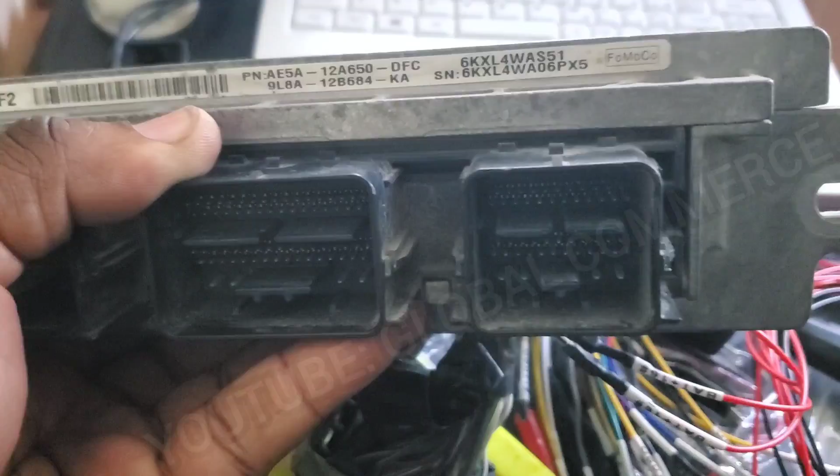This is for a 2010 Ford Fusion 2.5 liter, and we've got the connector. By the way, this first connector here is the body connector, so this is where your power, grounds, and communication are going to come in from.

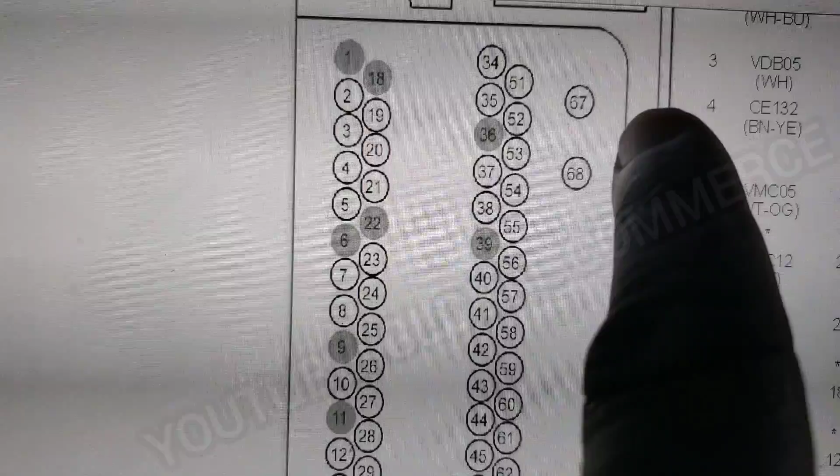Here's the pinout. So on this side, 68 and 67 is power, battery power, and 69 and 70 is ground. Then you got 38 right there, that is your ignition power.

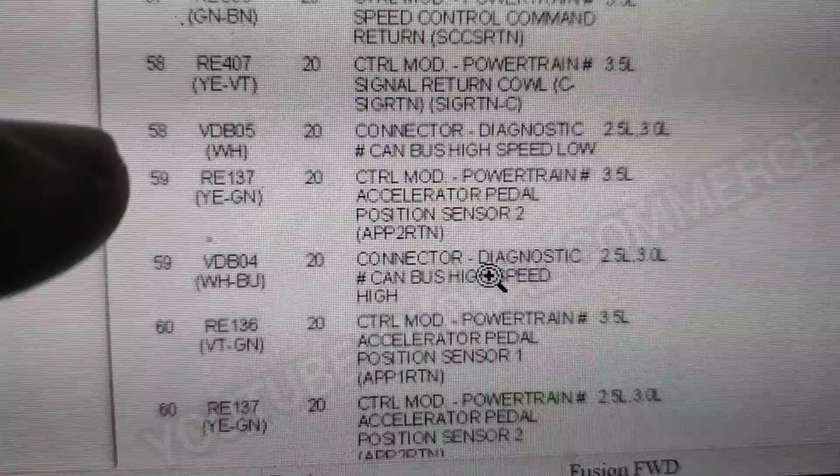It's a yellow and green wire. Here's your powers, white and blue. Actually, this is can high and can low. My bad, let me make sure, 58 and 59. Yeah, so on the 2.5, 58 is white, which is can high, and can low is white and blue. Actually, I'm sorry, can high is white and blue, and white is can low, all right?

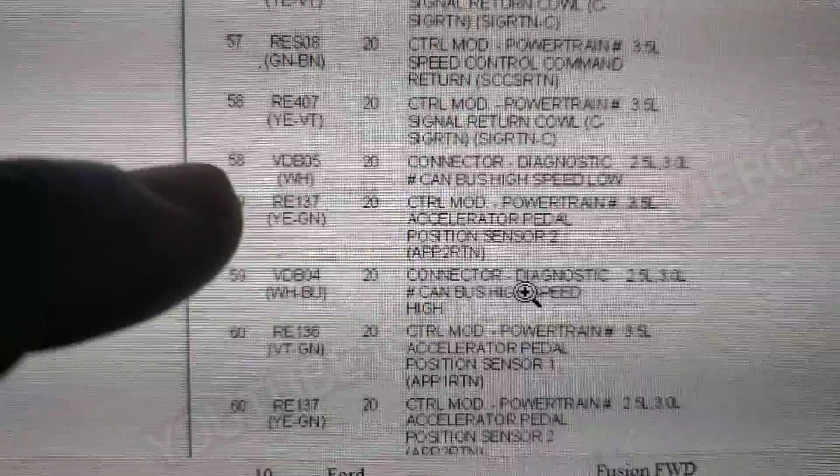And then at 63, we've got our FEPS connection. That's very important. Without your FEPS line, you will not be able to put the PCM in programming mode, and that is going to be at 63 right there.

Hey guys, so there it is pinned out. As you can see, pin 63 for our FEPS, we've got it connected there. We've got our can high right here, if you can see that, and then that will be can low in the white. Then we've got our two grounds, and then we've got our constant power. Then we've got our ignition, should be right here. This should be ignition. There it is, ignition, right? So when we actually turn on our ignition switch, we'll get power.

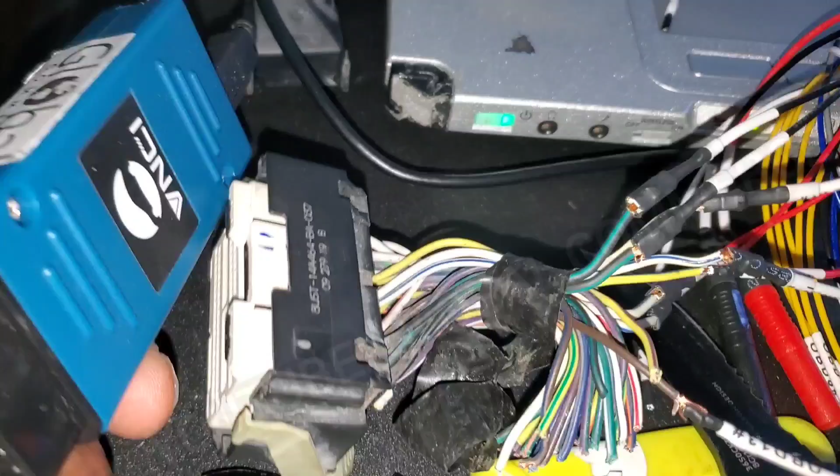Make sure guys you're updating your firmware. We are constantly, me and VNCI, we're partnered on this, so we're constantly updating the firmware. This is a new product, so as we find little bugs here and there, we're fixing it. So pretty much I think we got pretty much everything down packed, but it is a work in progress. Keep that in mind, but it is operating and doing everything as it's supposed to.

So now I went ahead and plugged in, and as you can see, we've got our ground already connected because 4 and 5 are bridged. Now I'm going to go ahead and connect it in our PCM. I always do a quick check using ForScan just to make sure my connections are good, and my connection was actually backwards on my power.

So the white and blue coming from, I believe, what was that? The ones at the bottom, the white and blue connectors for the power, those should be your ignition power, right? So I just swapped it, I put ignition, and that's it. So I can now turn off the ECM with this red ignition switch when you need to turn it off, so just keep that in mind guys.

And there you can see the activity lights. We've got a green and a flashing blue, and the VCM is active.

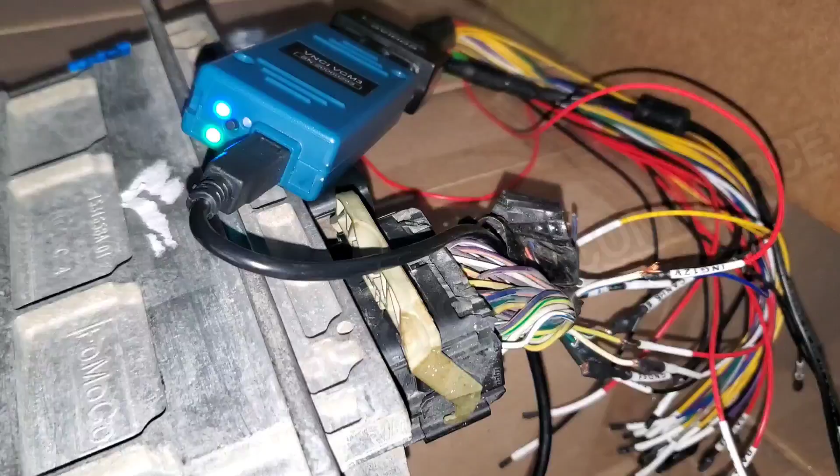So let me close out of here, and now we're going to go into our VMware image available on our website. Comes with the GC VCM3 unlimited IDS, so you can do everything you need to do, you don't have to worry about it. And as you can see, this is the current VIN that is programmed, 07693. So that is going to be changed by the time we're done with this. So I'm going to tell this, no, I don't need to save that, and I'm going to exit out of here.

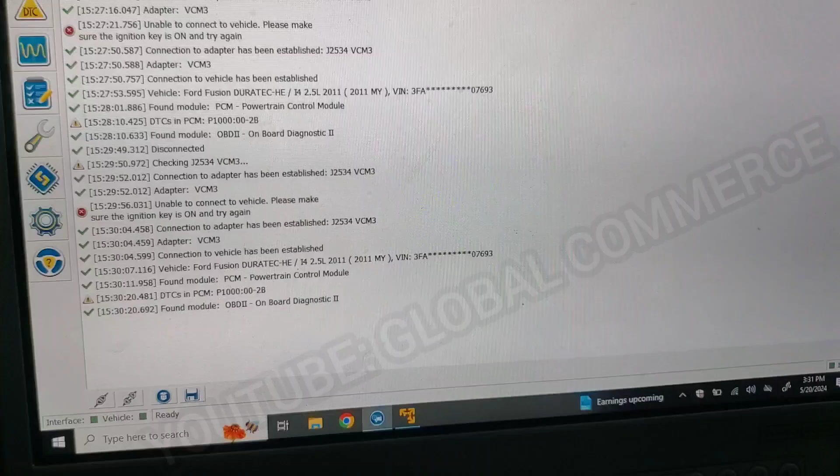And I already have VMware Player open. And guys, some of you had some issues installing the VMware Player. This is very simple, it's only 3 steps guys. You download and install VMware Player 17, and it will come up to this menu, but these will be blank. I have multiple in here, yours is going to be completely empty.

And all you do is open virtual machine, and you navigate to the file that you downloaded from our server that you extracted, and you just open that file. And that's it, that's the step everybody misses, and it's on the instructions. It's not rocket science guys. Anyway, I've already got mine added in, and one quick tip, in case you get an error, it's actually this one.

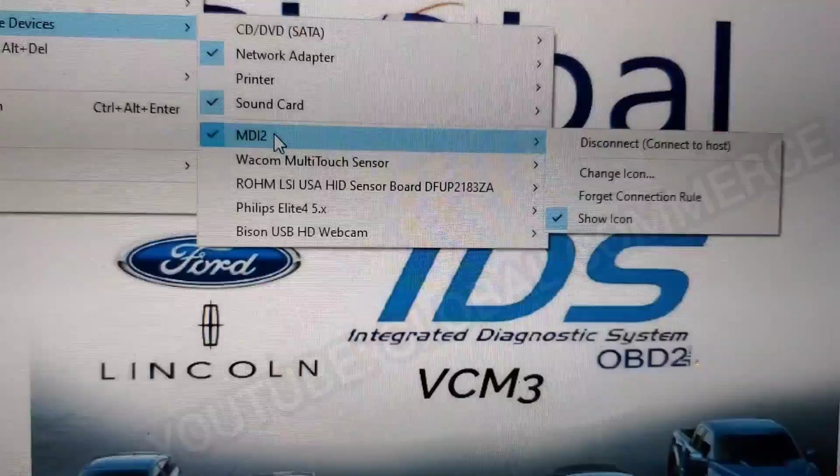Mine is already connected. If yours isn't, you have to hit the connect button right there, and you'll have to go connect it. What that does is take the VCM3 off of your computer and connect it into this virtual machine. Once connected, it should look something like this.

You can check this if it's your first time, and periodically after that. Go to the VCI device manager, and you should have internet connection. I should have internet right now, but I don't. In case this happens to you - actually, I did nothing, I got a call and it came up on its own.

But if you do have this issue where the connection never comes up, go to removable devices, then network adapters, then settings. Right now I'm on bridge, replicate physical connection. You just switch it to NAT and hit OK at the bottom, and that usually takes care of it. Vice versa, you could change it back. One of those will always enable your network internet connection.

Now that we're done, we open the VCI device manager, and now this should detect our VCM. And it is not. Let me see what's going on. So it shows I'm connected.

What I'm going to do, in case the device is locked up, is unplug the VCI - the light went off on it, as you can see - then replug it. Heard it beep, and now it's automatically being detected.

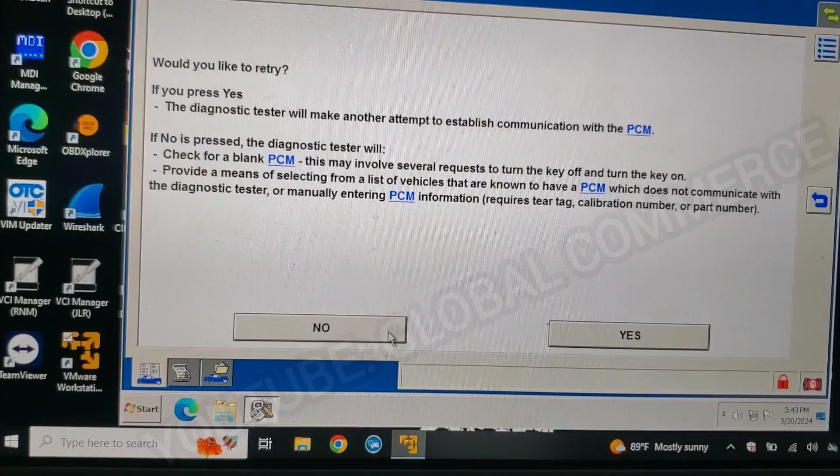You're never going to turn it on until I tell you, right? So we're just going to tell it no. It's telling you to do all this, but you ignore it.

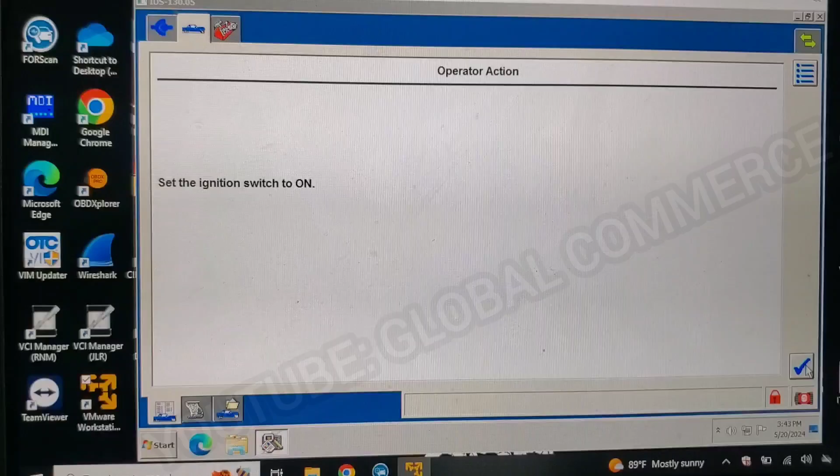Just keep ignoring it, just keep hitting the check mark, because we're going to get to the VIN information screen, and that's what you want. And there it is. So now we're going to actually enter in our VIN that we want to be programmed into our used ECM.

All right, so I'm going to go ahead and enter my VIN in. This is the VIN that we want programmed in. I'm going to tell it OK. No, we don't want to retry because I know it's not in there. We're going to do a new session.

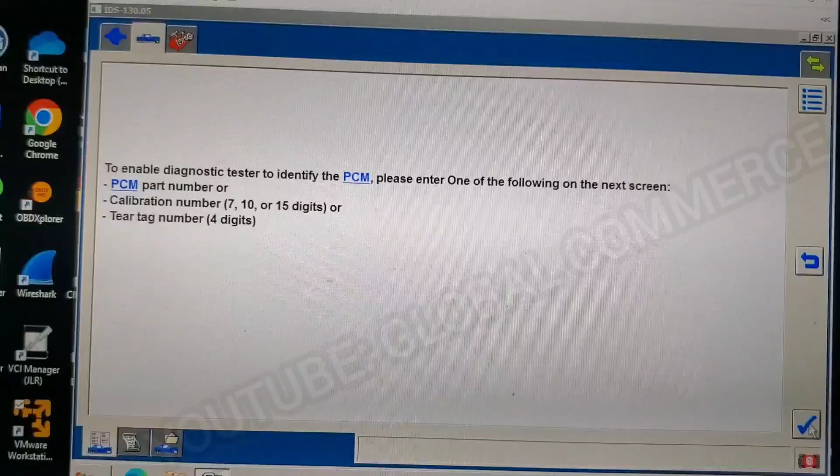So now we're going to enter in the tear tag number. On this, the tear tag number is right here on the front of the ECM. It's KTF2, so we're going to enter that in. Actually, I did that wrong. KTF2. There it is. Then we're going to tell it OK.

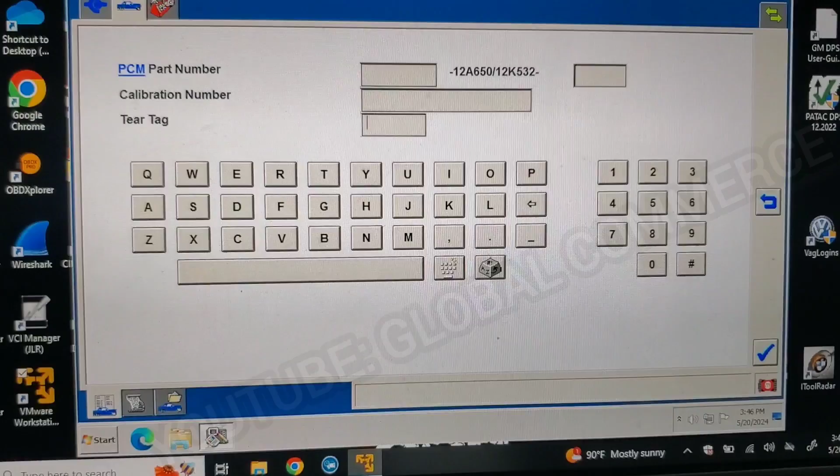Incorrect. Yes, let's try that again. I'm just going to enter in the PCM part number that's on this one. You can go to search Ford as built depending on your model of PCM. You just search like this, Ford as built data, and you go to the Ford website, see that Motorcraft service. Let's just select our country, the USA, submit.

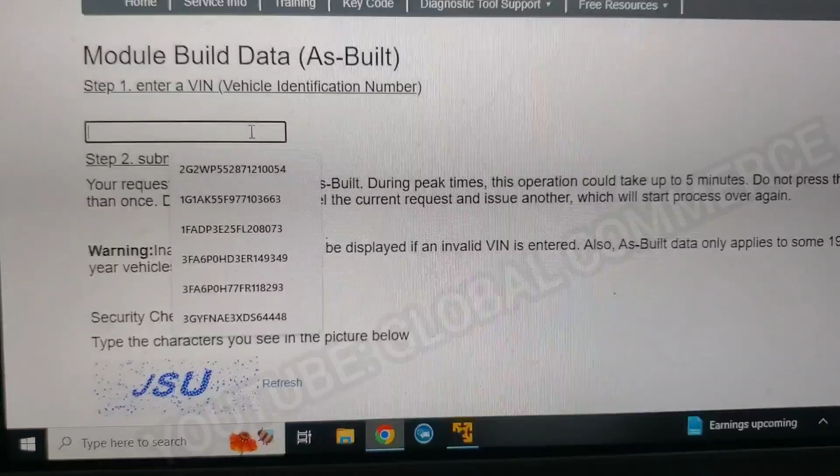Now, if you scroll down to the bottom, you'll see right there it says module build data as built. You click on that, then you can enter in your VIN number. Like me, I can put mine in here and then put this in, JSU, and then hit submit. And it's going to give me all the information, right?

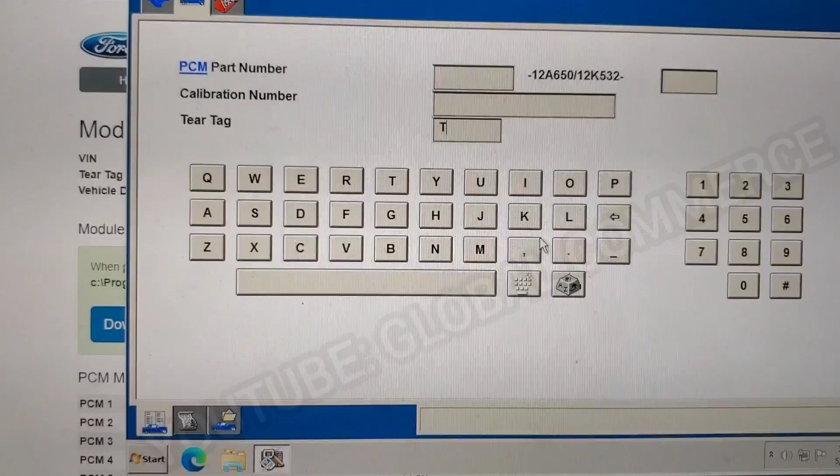So the actual tear tag for mine is actually TPN1. That's what I need to enter. So I'm going to go back here and enter that in. TPN1. Oh, that's the problem. Okay. TPN1. There it is, so I got that in. Hit the check mark, there it is.

And ours is a Fusion. I'm going to tell it OK. No, well, that's fine, it doesn't matter. Okay, and there it is, 2010. Yes.

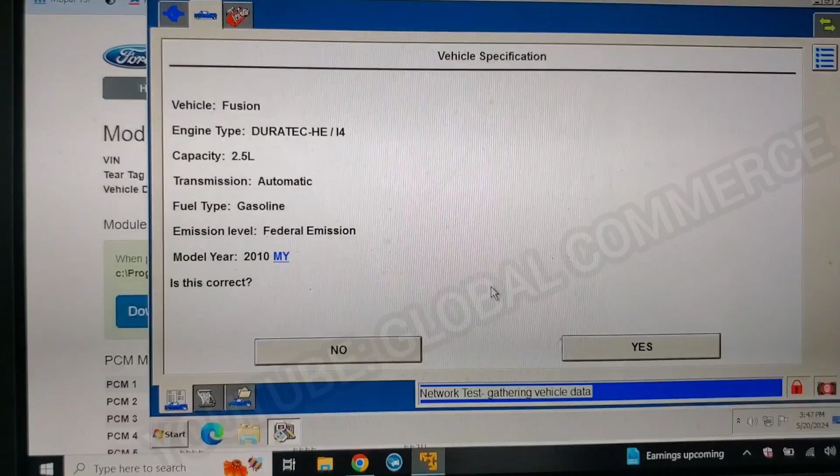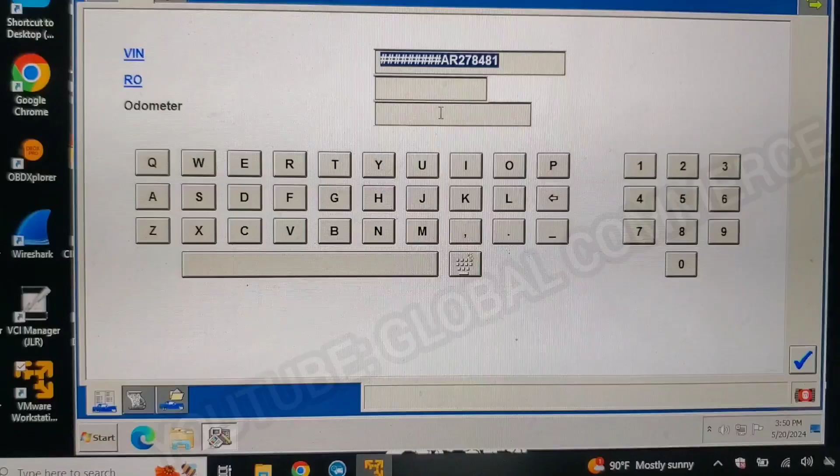All right, now it's going to come to this screen. A lot of people try to mess with this, leave that alone. Go in here and put your mileage, guys. 266629 is what this one is. I'm going to tell it OK.

And that's it. Now we're going to go up here in the toolbox, then we're going to go to module programming, program or module installation. Then we're going to select PCM. Tell it OK.

We're not going to turn it on yet until I tell you guys. So it's going to come back and ask us for the VIN again. So we're going to enter in the VIN, right? All right, so I just entered it in, my VIN. Tell it OK.

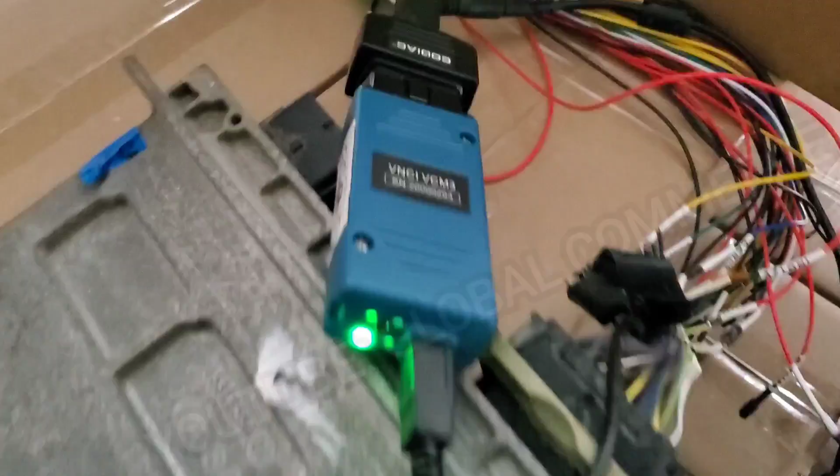Okay, loading necessary files, switch ignition off. It's already off. Install a new module. Now this is the point where we're going to actually turn the power on, right? Set ignition switch to on. So I'm going to go ahead here and hit our power button here. So now we've got power to the module. And then we're going to tell it OK. No.

So we're going to need to enter in the solenoid strategy on this one. I got mine, so I'm going to enter that in. All right, you need to go on your transmission and it'll look like this. As you can see, solenoid strategy and solenoid body ID. You need to get that number, it's physically on your transmission. Okay, guys? I'm going to tell it yes.

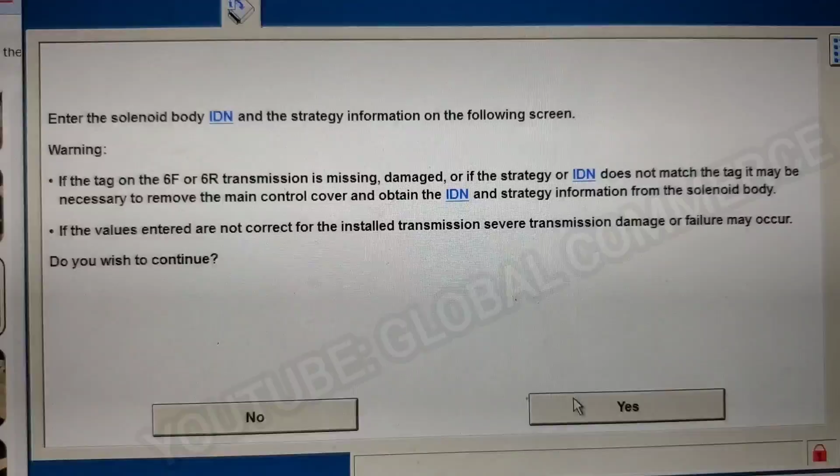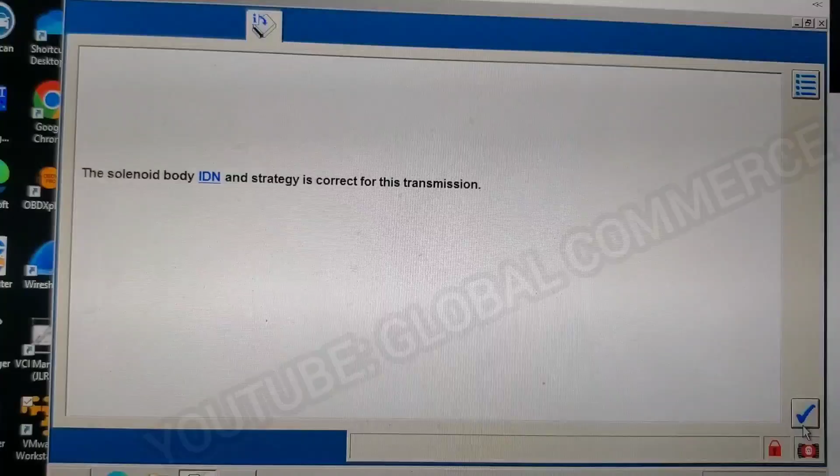Strategy, I'm going to put that in. So I've got both of them in. I'm going to hit the check mark at the bottom. They are correct for this transmission. All right, tell it OK.

It's going to download the required files from the network. Tell it yes. It located the file that we need. Good, so we tell it OK. All right, tell it OK.

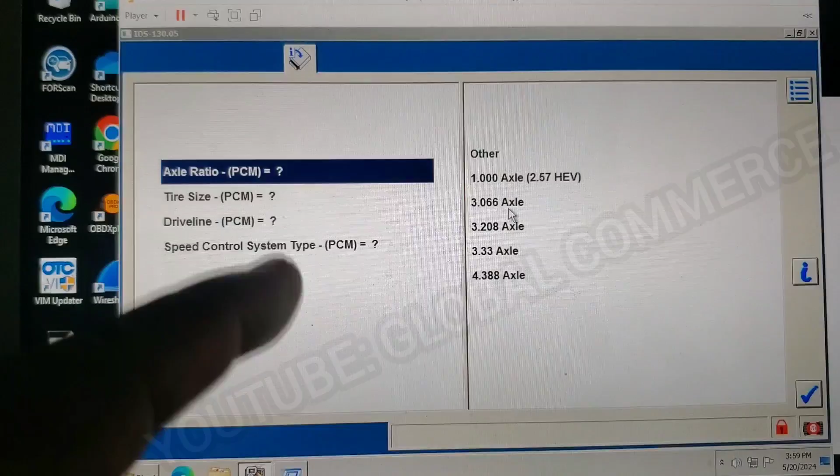So now we need to enter the valid information for this PCM. If you don't have the Ford decoder, and you're a member of the channel, head over to the members area, the Ford decoder is there, guys. And you'll be able to look at the VIN number on the sticker and decode and get the actual information on this for your vehicle.

And I know what this one is for this vehicle, so I'm entering it in right now. Front wheel, cruise, and there we go. So I'm going to continue.

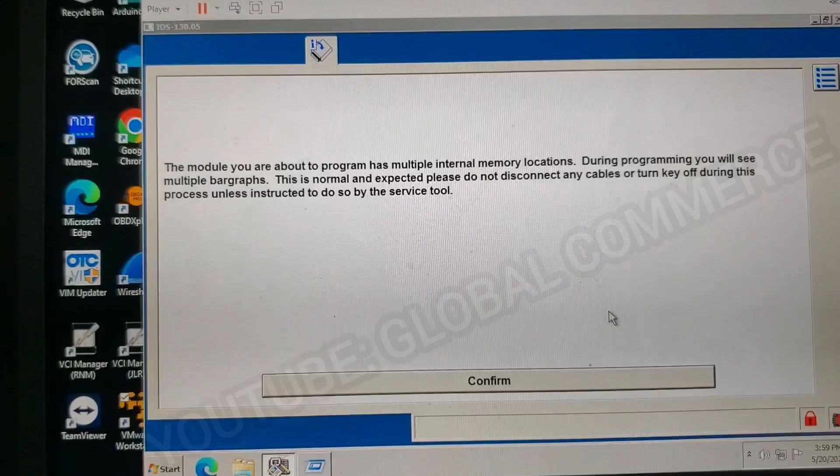Yes, just letting you know there's multiple locations, so you're going to see it program. It's going to end and start back over as it's programming different sections until it confirms.

Ignition off. Let me go ahead and do that. No more red light here. And then we're going to tell it OK.

Switch ignition on. This is where it's going to try to enter the PCM into FEPS mode, right? You can see the light on the interface. So we got the ignition on, tell it OK.

And there it goes. It says erasure in progress. You can see that blue light going there. That means it's actually doing what it's supposed to do. It's going to erase it, then it should start to do the programming.

And there it is downloading. And now it's programming the actual module.

All right guys, every now and then you're going to get it—you might see an error if you don't do the steps to turn it on at the right time. It'll say something like error 8502, something like that. All that just means is that either you don't have the correct cable in for your FEPS.

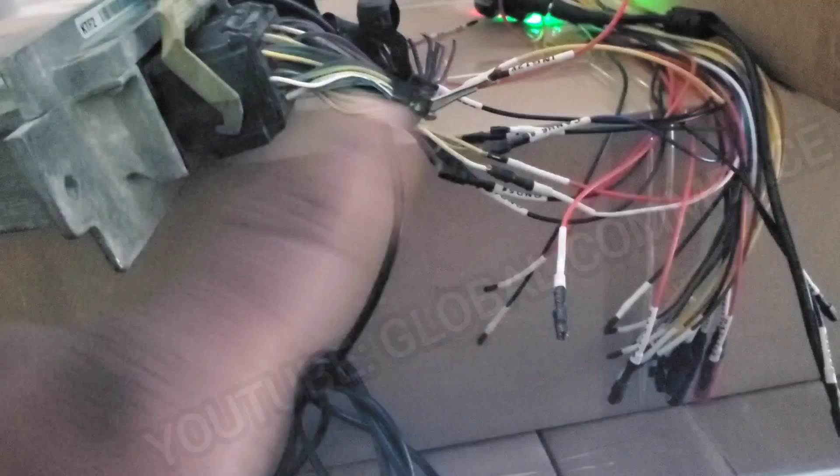If you're on the vehicle, you don't have to worry about this because you can do this on the vehicle—you don't have to be on the bench like this. But if you do not have the correct cable in for the FEPS, it will not be able to put the PCM in programming mode. So at that point, you're going to need to definitely double check your wiring.

And once it does get it properly, you'll be able to do the erasure. Anytime it does not show that erasure in progress, that means it was not able to put the PCM into programming mode. So I'll bring you right back.

All right, we're right here at the end. And then it's probably going to start, if it doesn't ask anything, it should start the other. There it is, erasure in progress, and now it's programming the smaller EEPROM area, and that's why this is faster.

Those values that it asks for in the end, like the ratio size of the axle, that's what's stored in this section of the flash, or the EEPROM rather.

That's done, and we're just gonna follow the prompts from this point on, and that's it. It's just that simple, guys. This is not rocket science, man. Anybody can do this.

In fact, okay, this happens every now and then, guys. Don't be alarmed if you see this after it programs. I've seen this happen before, but it's programmed, it's done. At this point, you can do whatever you need to do.

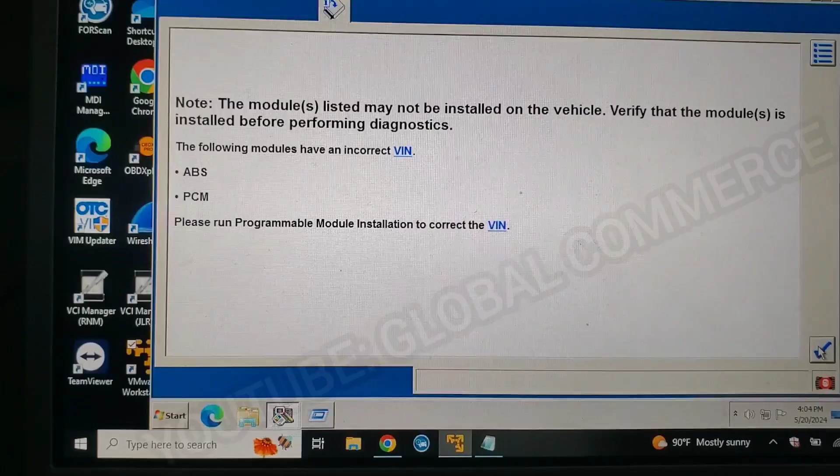So we're gonna tell it okay. It's programmed both sections, I'm just gonna go ahead and cycle power to the PCM, just because. So I hit the power, turned it back on.

And at this point, if this was on the vehicle—so you're programming this for a replacement used ECM for your vehicle—at this point, you're going to need to do what is called a parameter reset, right?

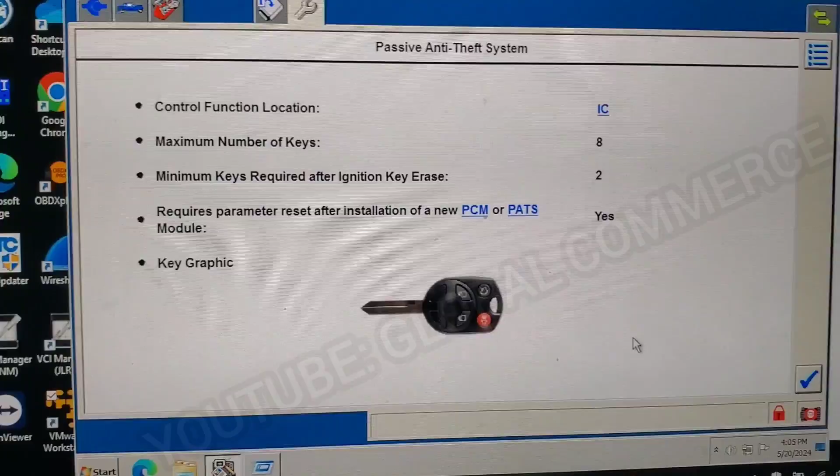So you go into the toolbox up here, and then you're going to go to body, security, PATS functions, double click on that. And you're going to tell it okay. All right, tell it okay.

Now, to enter into the security mode, it takes 10 minutes. You have to wait 10 minutes. You hit yes—I'm not at the vehicle, so this doesn't make sense, I cannot do this. But if you were, you wait. The whole 10-minute counter has to go through. Once it's done, you're into the secured mode, and then you can select parameter reset.

At that point, it will sync this used ECM with your vehicle, right? So, and that's it, guys.